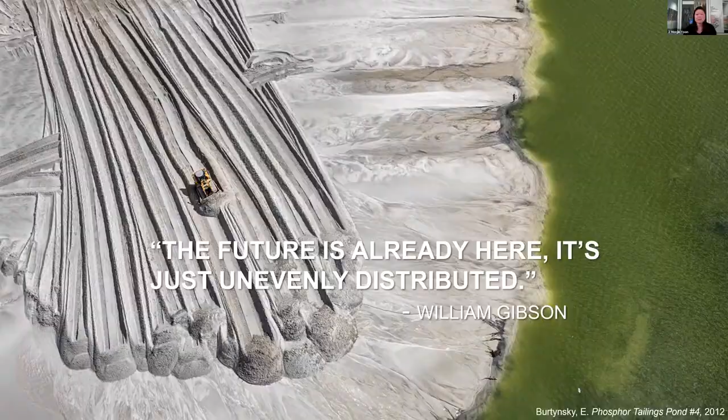As shared by science fiction writer William Gibson, the future is already here, it's just unevenly distributed. So in order to peer into the future, we need only to look deeply into our present. And oftentimes the future is tucked away in our studios and labs on our campuses. The university is not only a place that has insights into the future, but it has an important role and responsibility in prototyping that future.

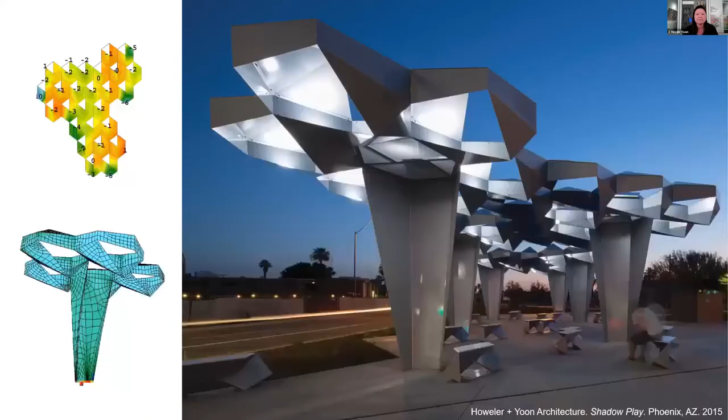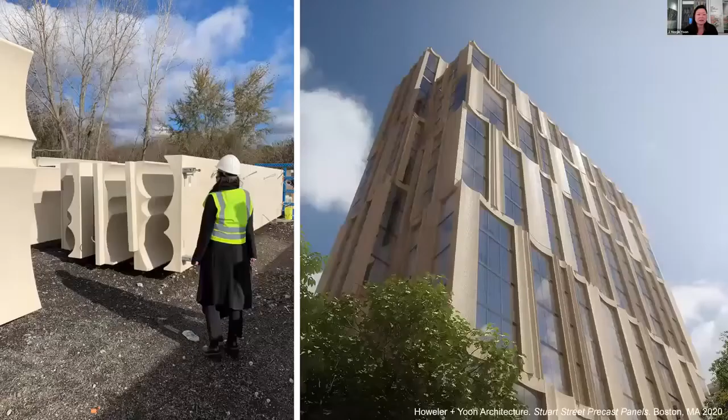My own design work and research moves between the studio, the lab, and the city, and is focused on public spaces, both in terms of the formal organization and the informal behaviors they engender. And specifically, the role of technologies in design, experience, and making is what I focus on—specifically the development and creation of publicness and public space. From interactive architectures and computation to create environmentally responsive structures, to robotic fabrication, my work examines the limits, constraints, and opportunities of design technologies and how these technologies might scale to the scale of buildings and ultimately to the scale of cities.

Our present moment is characterized simultaneously by a superabundance of information and digital connectivity, and simultaneously a continued lack of certainty. In fact, our age of information and big data coincides with the age of post-truth and an erosion of trust. According to German engineer and economist Klaus Schwab, we're in the midst of a fourth industrial revolution.

An age of rapid societal transformation at the global scale, transformed by science and engineering, from mapping the human genome to robotics and additive manufacturing to machine learning and artificial intelligence. These technologies are enabling us to, on one hand, solve extremely complex problems, but they're also rapidly changing the way we create, exchange, and distribute value.

Facing a paradox between accelerated technological progress on one hand and the daunting public health and environmental challenges on the other, designers are asking simple questions with complicated answers, most often beginning with what can we do and how can design better serve the world? How do we use design to think through the biggest design challenges of our time?

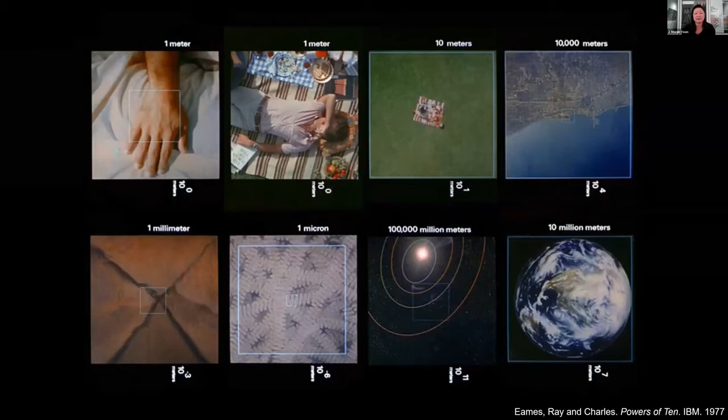Among designers who expanded the definition of design were Charles and Ray Eames, who so elegantly in their film, The Powers of 10, examined the relative scale of things from the microscopic to the macroscopic across science through design. And maybe another more contemporary example of design across scales might be Apple.

We used to, for my generation, think of Apple as a computer company. Through a redesign of their own Powers of 10, they went from designing computers to redesigning the whole user experience between communication, information, and media. And they created a whole design ecology of objects, interfaces, experiences, and services. They leverage design across scales, and they also are designing more than functional objects. They're designing demand. So design has never had the status it has today.

The proliferation of the term in business schools and engineering programs are indicators of this status. But in my opinion, design is as much an art as it is a science. It's nonlinear. It requires expansive analysis of constraints and opportunities, but it also requires a high level of discernment, synthesis, and aspiration. And thus, design is more a searching than a solving. It's more an inquiry than a methodology.

I think one of the best definitions of design I've heard is from Herbert Simon, who is a political scientist and early framer of the field of artificial intelligence. In '69, he said, if science is concerned with the world as it is, then design is concerned with how things ought to be. It's this oughtness, the world as it ought to be, that articulates the goal of design, which is an inquiry into our deepest human values and aspirations.

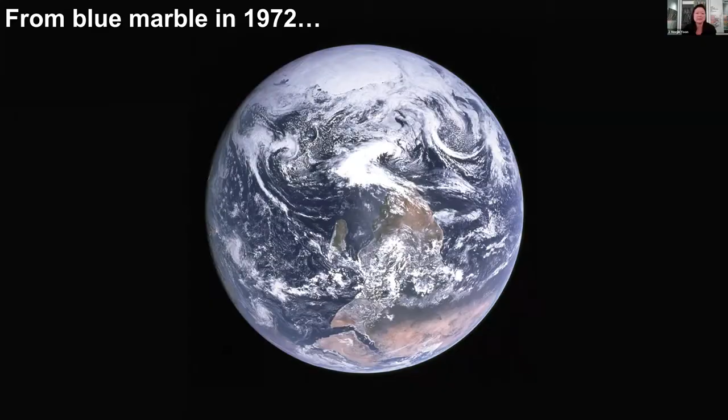If design requires imagination, then how do we image the world, and how we image the world matters. The famous image of the blue marble, the first clear image of the Earth beautifully illuminated by Apollo 17, taken by Apollo 17 in 1972, allowed us to see for the first time the Earth in both its fullness and its vulnerability. The image awakened an environmental consciousness that would lead to the global environmental movement of the 70s.

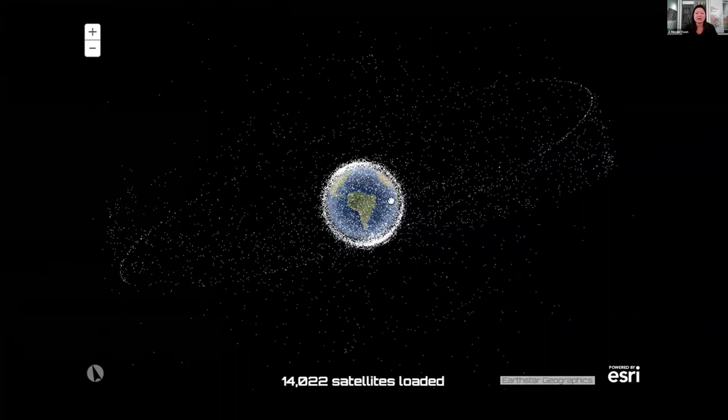Climate, as opposed to weather, is not something you can perceive. Climate is the sum total of weather phenomena, its averages, its patterns, its trends. It's a statistical condition. We cannot truly design for climate change without leveraging these massive amounts of data.

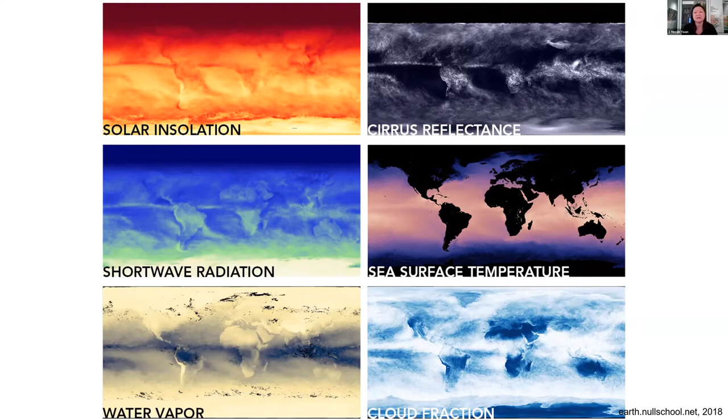So what does this data show? This representation shows the impacts of climate, 100-year storms happening more intensely with devastating impacts on communities and cities. Can we design our way out of these catastrophes? Could these catastrophes be avoided?

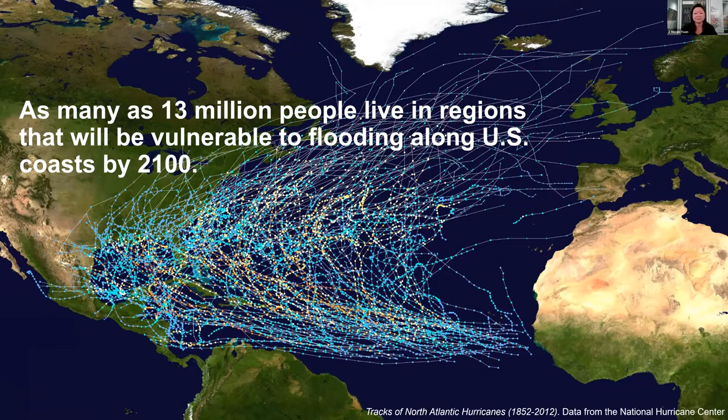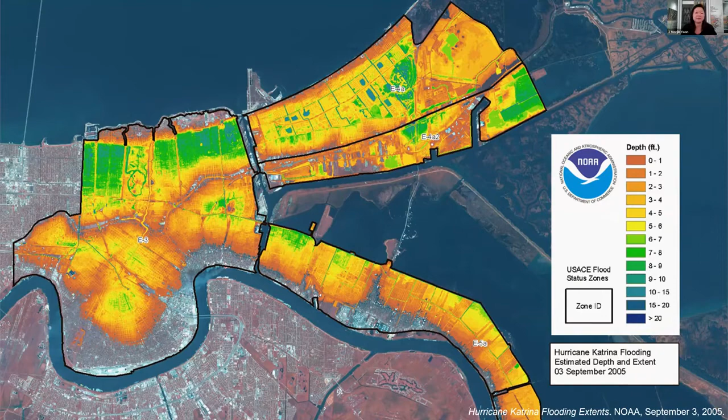Increasingly, we see that these catastrophes are not force majeure, but a combination of bad design decisions and severe weather events. Here we see a flood map of New Orleans after Hurricane Katrina, which makes quite evident that the hurricane was not just a natural disaster, but a man-made one as well, where poor design decisions from land use patterns to failed infrastructure had a catastrophic impact on the city.

When Katrina made landfall in 2005, the storm surges caused a failure of over 50 levees, submerged 80% of the city, and led to approximately 1,800 fatalities and the loss of 125 billion in property.

This was a feature that did not need to happen. It was not only predicted 40 years earlier, but it was directly experienced in 1965. Hurricane Betsy devastated the same region. The storm killed over 70 people. It was the first hurricane to cause over $1 billion worth of damage. The images are eerily similar, making evident the failure of design and politics to learn from its past mistakes and propose better design solutions for tomorrow.

If we zoom out a little further, we understand better the relationship between the Mississippi and the Gulf of Mexico. On the left, we see this extraordinary map by the Army Corps of Engineers, which records the movement of the Mississippi. It was actually through the hardening of the Mississippi with dams and levees to control the adjacent flooding that contributed to the reduction of the wetlands that historically provided a natural buffer to the hurricanes along the Gulf.

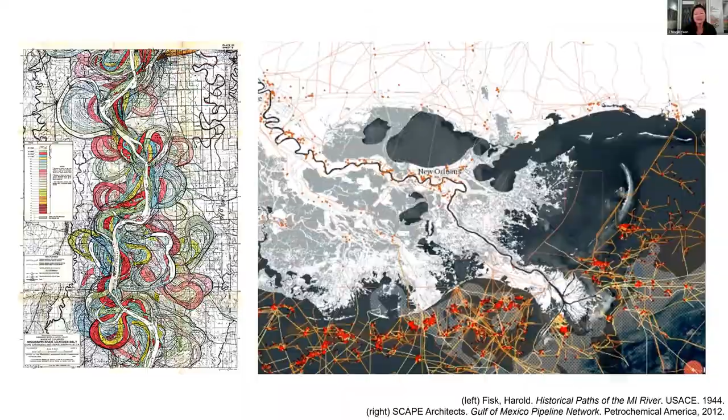We often hear the terms sustainability, resilience, and adaptation used interchangeably, but I think it's important to understand the nuances between them. Sustainability suggests that the goal is to sustain a recent or near recent condition. Resiliency implies a kind of bounce back, literally. And adaptation, on the other hand, asks, should we really be striving to bounce back, or should we be adapting and changing in new ways?

Hurricane Sandy was a kind of wake-up call for designers, and it precipitated all kinds of government and institutional programs to rethink coastal design, including the Rebuild by Design competition sponsored by HUD.

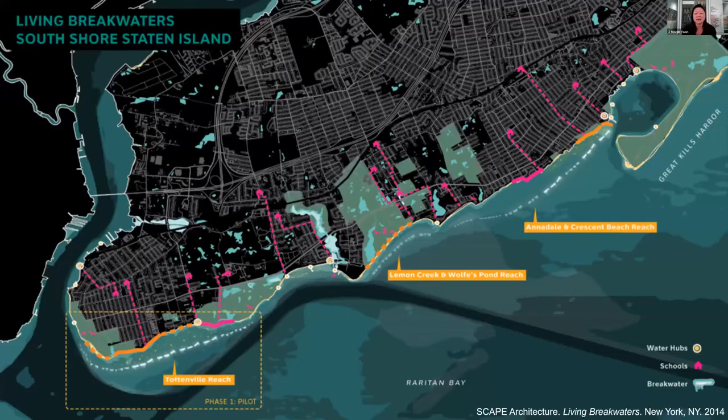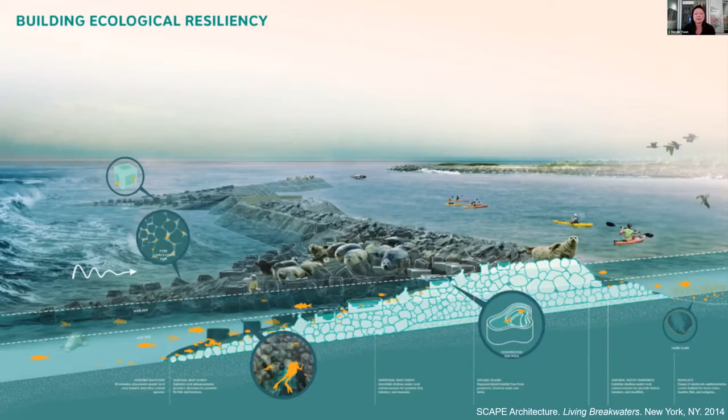One of the most interesting projects that came out of that was Living Breakwaters by landscape architect Kate Orff, who overlaid coastal resiliency infrastructure with habitat enhancement techniques to buffer neighborhoods from wave damage by both thickening and softening the edges with habitat for oysters and other organisms, essentially creating a kind of living breakwater infrastructure. This proposal was awarded $60 million in funding and is currently being implemented.

So I think this project demonstrates that the future of sustainability may be more brown than green and more soft than hard as we look at adapting our coastal cities to sea level rise.

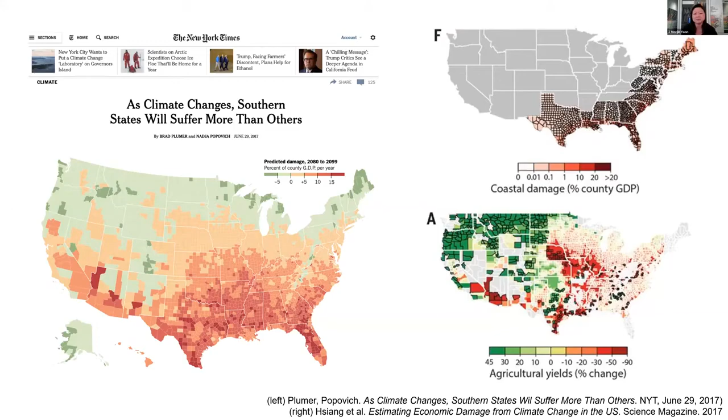The other thing we know is that the impacts of climate change will not be evenly distributed. Professor Linda Shi from Cornell City and Regional Planning looks at coastal conditions here in the San Francisco Bay Area, where different communities are battling sea level rise independently, at times creating local solutions that have the cumulative effect of creating more disastrous sea level rise impacts on neighboring communities, exacerbating the unequal vulnerability between those that can afford resilient strategies and those that cannot.

Students in her climate adaptation workshop project how one town will experience infrastructural, social, and fiscal vulnerability from sea level rise, helping to create awareness among public policymakers about the need for regional collective action to mitigate local impacts.

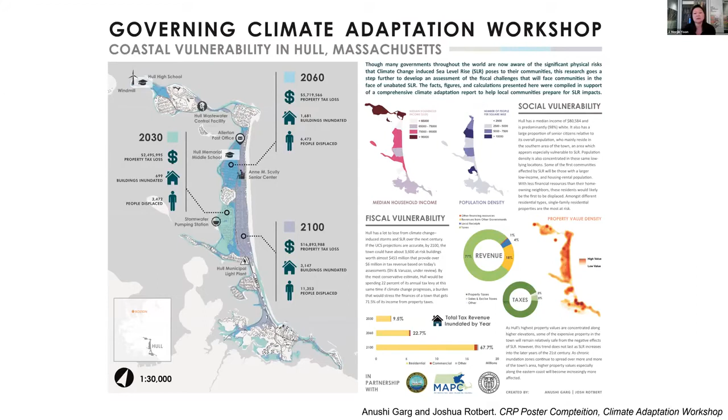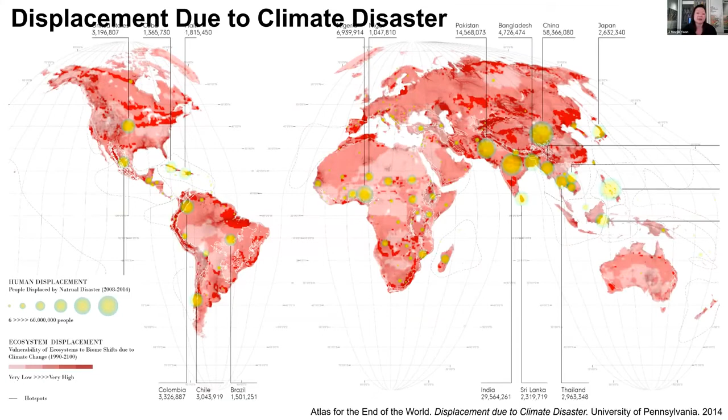Climate change is, of course, not only a problem here in the US, but around the world. Drought, famine, flooding, and disease are just a few of the many secondary effects of climate change, all of which result in the migration of people from places that are no longer sustainable or habitable. While migration is not a new phenomenon, it's steadily growing.

In 2018, 17.2 million people were forced to abandon their homes due to disaster, and this number is expected to rise above 22 million this year. In sum total, migration has reached a record high. The UN reports that there are nearly 71 million persons of concern.

26 million to 29 million people are considered refugees. 41 million are displaced within their home countries, and more than 35,000 people were forced to flee their homes every day in 2018. That's nearly one person every 2 seconds.

One of the greatest design challenges with migration is the precarity of human settlement. Refugee camps are temporary and provisional by mandate, and despite the fact that many refugees stay in these camps for an average of 12 to 20 years, due to policies, these camps cannot provide more permanent shelter or infrastructure. The resulting condition is essentially a permanent condition of temporary encampment.

Due to the number of displaced people who move to cities for better access to resources, thinking of migration as an urban design and policy design problem is crucial. If the current growth rate of cities is maintained, then 6 billion people will be living in cities by 2040, with a quarter of that population living in informal settlements. Designers, planners, and governments will need to rethink access and provision of basic services at unprecedented scales.

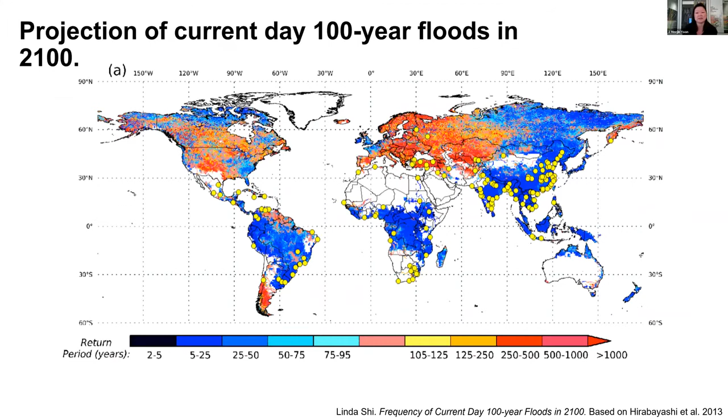Furthermore, the number of cities facing extreme risks from climate change are astounding. Some 84 of the world's 100 fastest growing cities will face layered challenges from rising temperatures and sea level rise. By 2030, the world is projected to have 43 megacities with more than 10 million inhabitants, much of them in developing regions. Many countries will face challenges meeting the needs of their growing urban populations.

While rapidly urbanizing cities are both our greatest design challenge, they're also our best opportunity for tackling design of climate at scale. How we design and build our cities will have a significant global consequence. Essentially, 1/3 of CO2 emissions comes from the transportation sector, and the other third comes from the construction sector, and both are inextricably intertwined with how we design and think about buildings and our cities.

As you may know, buildings are extremely resource intensive. And while the building and architecture industries have focused on performance to achieve green standards, the operation of a building represents only 20% of the energy consumed in the full life cycle of a building. The material ecology of a building, from resources extracted to manufacturing to construction, to its demolition and eventual resting home, is where the greater portion of energy is consumed and carbon emissions is produced.

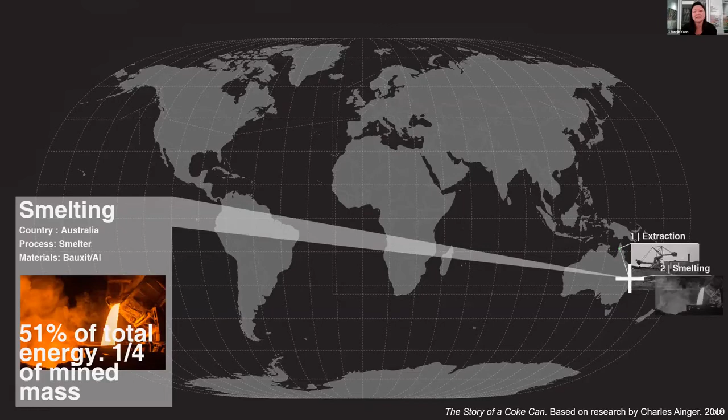Maybe I could illustrate this complexity of supply chain and energy consumption for a very simple design object like an aluminum Coke can. Bauxite is mined in Australia, then it's smelted and it consumes 51% of the total energy to yield a quarter of the mined mass of the ore. Then it's shipped to Sweden, where it's hot rolled, it's cold rolled in Germany, it's then stamped in England, it's washed in France, then it's shipped to the United States, and it's stocked in 2.8 million vending machines or stores, and then it's consumed in a few minutes and then tossed in a landfill.

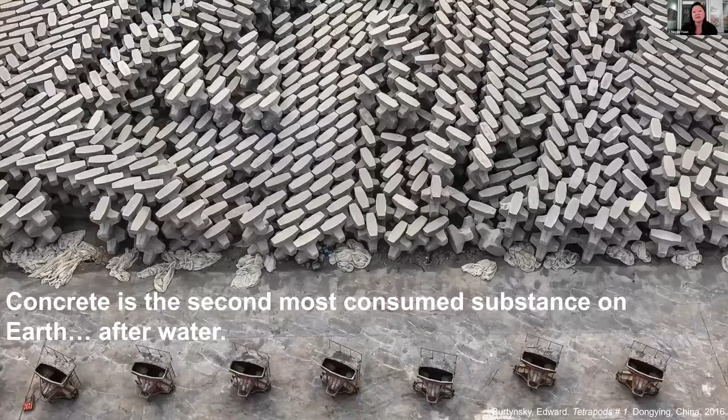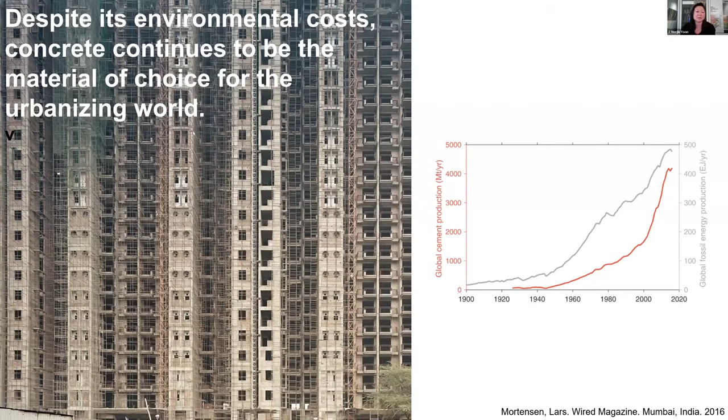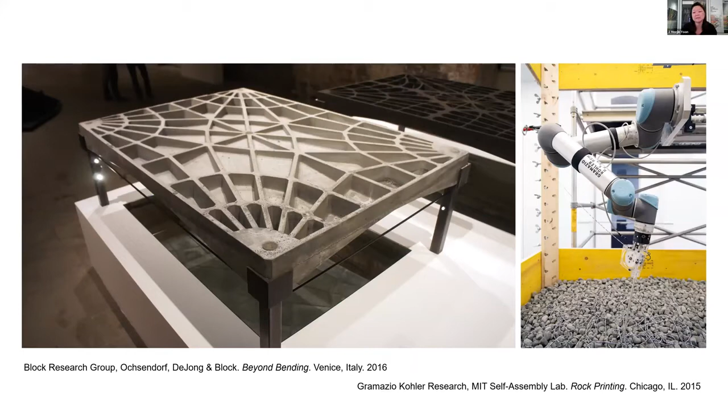Concrete is the second most used material on Earth, only second to water. It's the most widely used construction material in the world, but it's also the most environmentally damaging. The manufacturing of concrete alone is responsible for 5% of global carbon dioxide emissions, and it's a material that cannot be easily recycled. Yet, it's the preferred material of choice in the rapidly urbanizing world. Many architects and engineers are researching ways to make concrete more sustainable. Another area of innovation in sustainable construction is in the area of mass timber.

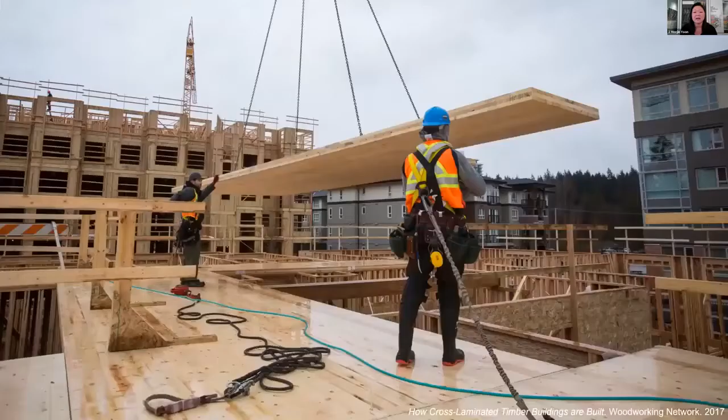Wood is a rapidly renewable material when paired with sustainable growing practices. Here we see Lisa Gray's research at Timber City, which explores the environmental efficacy of mass timber construction technologies. The emergence of mass timber uses solid and composite woods assembled together to create more structural integrity. Researchers speculate that one could build mass timber buildings that are 30 to 40 stories tall. And while that goes against our conventional wisdom, because wood is a combustible material, timber at a certain mass actually produces its own fire retardant behavior.

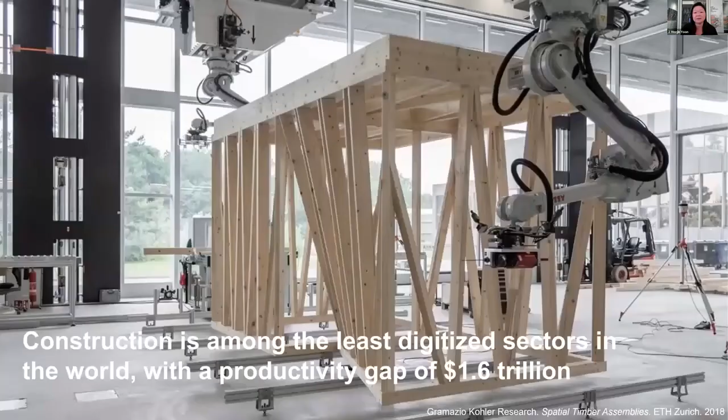Interestingly, the construction and building industry remains one of the most archaic industries. One of the foundational principles of industrial construction is the standardization of parts. However, standardization, like the creation of your standard 2x4, results in a significant amount of material waste. And while other industries have increased productivity exponentially through the use of automation and robotics, building construction remains the least digitized sector, with a productivity gap of $1.6 trillion.

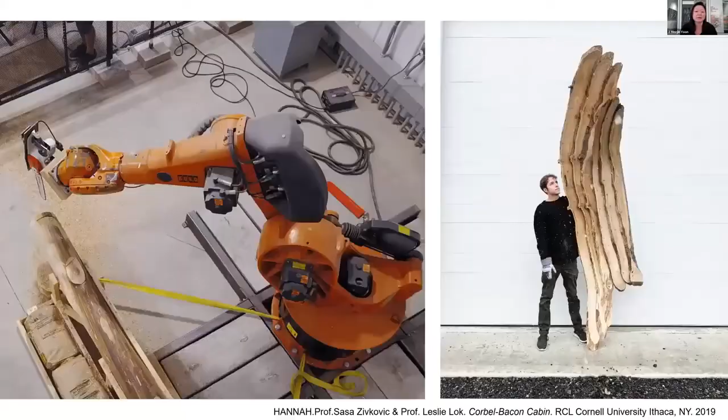One area of technological advancement that we're beginning to see in construction is robotic assembly and fabrication, from drones that stack modules to large-scale robotic arms in situ.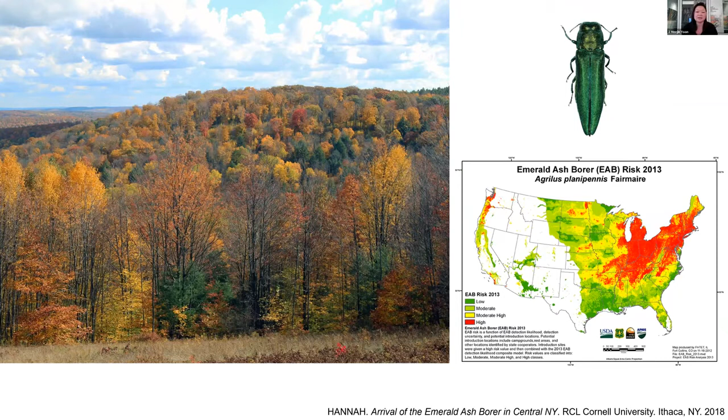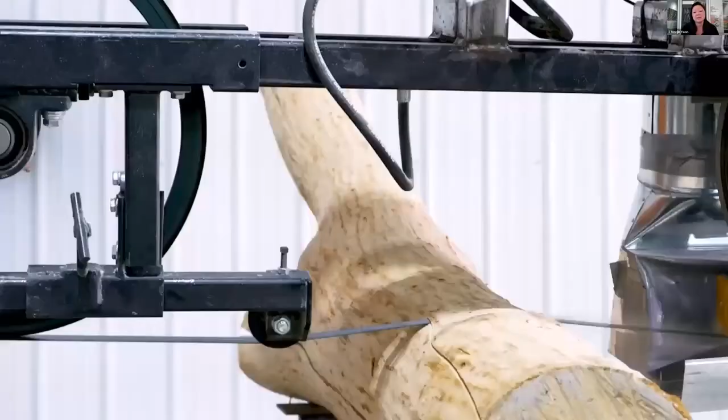This is a project I wanted to introduce called the Ashen Cabin, recently completed by Professor Sasha Zivkovic and Leslie Lok at Cornell's Robotic Construction Lab. The project responds to the local condition of the emerald ash borer that has infected ash trees across the Northeast and across the United States. Professor Zivkovic and Lok use these diseased trees not only as building material, but they work with the uniqueness of each of these diseased trees. They've developed a tool that processes irregular timber stock, allowing the robotic arm to carve irregular pieces of lumber that would normally not be possible if they had to work with industrialized standard timber manufacturing processes.

So here you can see this unique piece of diseased ash tree, which wouldn't be able to be used otherwise, being carved by this robotic arm to be used as cladding on a concept cabin, which also used 3D printed concrete for its foundations.

Images like this force us to think about material use and reuse. As mentioned before, the foundational principle of industrial construction is the standardization of materials. However, after a building is built, its materials become non-standard, challenging their reuse. Yet recycling and upcycling materials are key to reducing CO2 emissions.

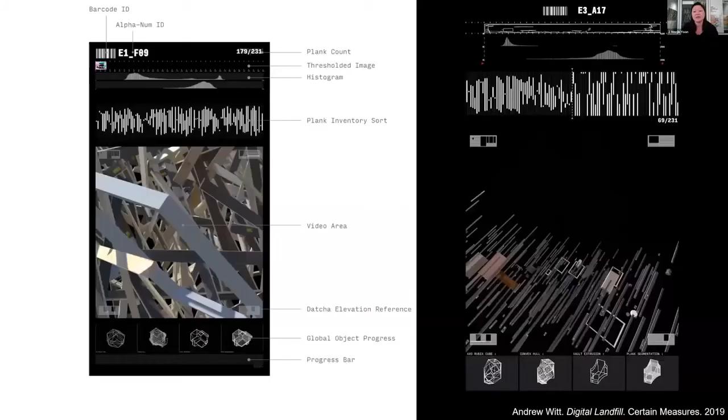Andrew Witt's work—he's a faculty member at Harvard GSD—shows in this digital landfill project how one could respond to the afterlife of a house. This house was scheduled to be demolished. Leveraging computational power, each of the components was cataloged, measured, and entered into a machine learning algorithm, which resorted all the elements to populate new forms out of this old material, essentially using waste to create new forms.

Architects are thinking more about embodied energy, more about material procurement, and more about the full life cycle of a building as they make design decisions.

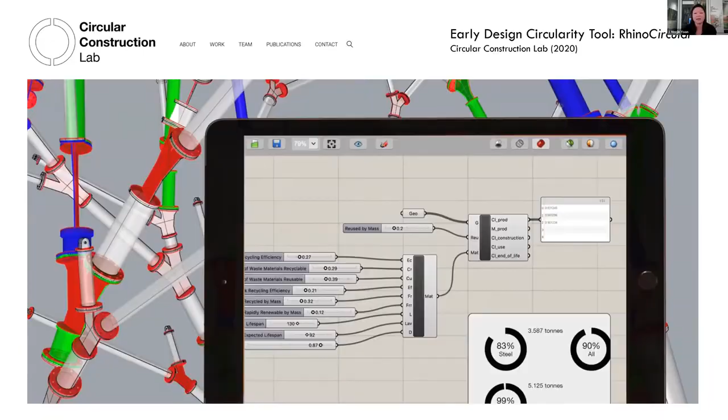Professor Felix Heisel here at AAP Circular Construction Lab is researching how to create a paradigm shift from linear material consumption towards a circular economy within industrialized construction industries. He's developed a new tool that enables the tracking of building components to help us better understand embodied energy. Here we see an urban scale material stock inventory measuring the circularity on both buildings and a regional level. I think this work is really exciting for where it will take the industry.

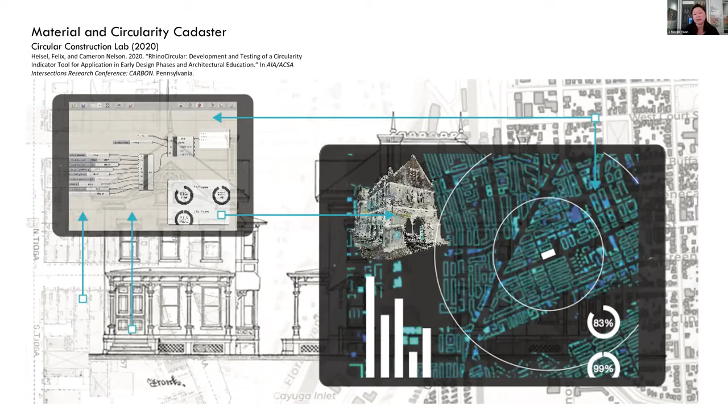So as we project into the future, if the last age was the age of industrialization and physics, we now have entered into an age, I think, of biology, where many designers are looking at nature in new ways to radically rethink our building blocks, quite literally.

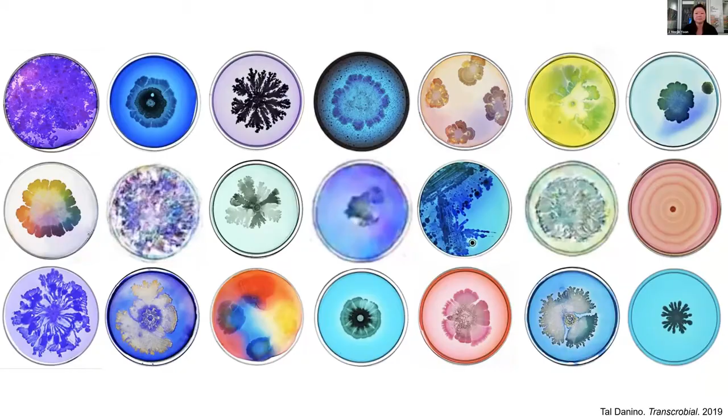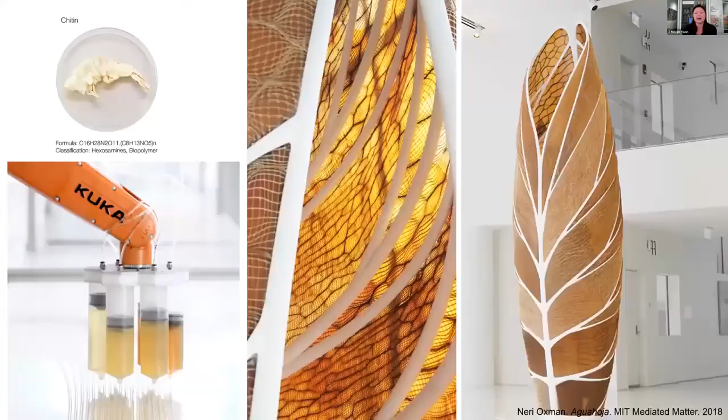From organic materials like mushrooms, asking how the material can be grown, processed, and compressed to make new compostable bricks—this is a project by David Benjamin at Columbia—or the work of Neri Oxman at MIT, who's researching chitin, found in shells, as material that can be 3D printed into new structures, to even partnering and co-creating with nature, here with silkworms to weave a silk pavilion.

Not all of biology, as we know, is collaborative, and we're just beginning to understand the complex biology powering the coronavirus pandemic. Scientists have learned that the virus has evolved an array of adaptations that make it more lethal than any other coronavirus humanity has met so far.

COVID-19 is our first pandemic of the jet age, where our physical interconnectedness via planes, trains, and subways circulated the virus rapidly across countries, territories, and regions. But it's also the first pandemic of the fourth industrialization, where data science, genomics, rapid prototyping, distributed manufacturing, and machine learning are contributing to research and vaccine development at speeds previously unheard of.

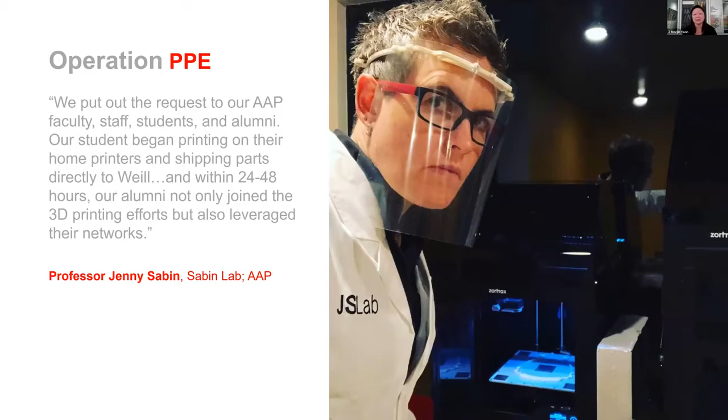It's also created a culture of collaboration and interdisciplinary innovation in science, engineering, and design that we've never seen before. Here at Cornell, Professor Jenny Sabin in the Department of Architecture, along with Professor Kirstin Petersen in Electrical Engineering and Computer Science, and Professor Amy Kuceyeski of mathematics at Weill Cornell Medicine, responded to a call by Dr. James Shin at Weill Cornell Medicine, and stood up what they called Operation PPE, utilizing their distributed network of rapid prototyping 3D printers across campus and through our network of alumni and industry to fill a desperate need for PPE in the early days of the pandemic, putting to use over thousands of individual 3D printers.

This spirit of interdisciplinary collaboration and mutual aid to develop solutions quickly through a distributed network led to further collaborations across institutions and the country, where architects, industrial designers, engineers, and doctors were working together to design everything from masks to non-rebreathers to patient isolation hoods.

That spirit of collaboration has continued today, and in Professor Sabin's class, Designing and Making Across Disciplines in COVID-19, the students are looking at methods that are emerging through new technologies across design, engineering, and science to synthetically think and make design solutions in response to COVID-19.

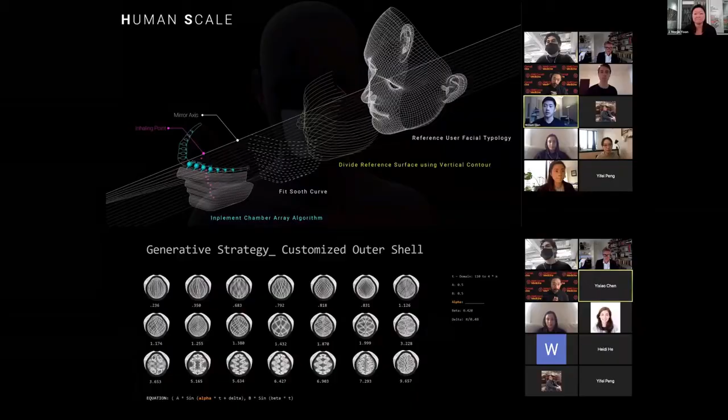Here's an example from Sabin's lab at Cornell in collaboration with Black Box at Princeton for a fabric harness, which allows individuals to turn any available piece of fabric into a custom fitted mask with this flexible face frame. I think it's really, really brilliant.

So sometimes in order to design the future, we have to look long and hard at our past. I'd like to conclude the lecture this evening by sharing the story of a memorial at the University of Virginia. This is a project that I've been really humbled to work on with an incredible design team of collaborators, Mabel Wilson, Frank Dukes, Gregg Bleam, Eto Otitigbe, and Eric Höweler over the past 4 years.

But the story begins over 400 years ago, when an estimated 430,000 men, women, and children were kidnapped and trafficked from Africa to the Caribbean to the American colonial South. They were forced to labor to support an economy based on the agricultural production of cotton and tobacco.

Founded by Thomas Jefferson, the University of Virginia holds a special place in American history. The grounds and the academical village are on one hand associated with the ideals of democracy, yet its foundations were literally built by slavery. As you can see from this historical marker, there's no mention of that in the standard history of the university. So the Memorial to Enslaved Laborers endeavors to tell the story of the estimated 4,000 men, women, and children who built, worked, and lived at the university from its founding in 1817 to the end of the Civil War.

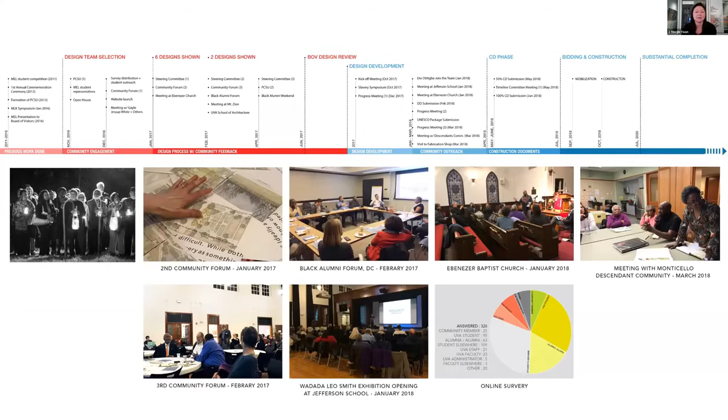We went from classrooms to local schools to churches. We spoke to community members and to members of the descendant community. And we didn't ask them what the memorial should look like, but we asked them what kind of meaning the memorial should have. It became really clear through that engagement process that for the memorial to have both meaning and relevance, it had to, of course, honor the lives of the enslaved, but it also had to advance the commemorative landscape for racial justice today.

So in our conversations, what we heard was that the memorial would need to tell the unvarnished truth of the past to have any legitimacy, that it needed to bring the community together to both learn and reflect on that history, and that it needed to express dualities, not only of pain and suffering, but also resilience, dignity, and humanity.

And lastly, it needed to be a living memorial and an ongoing memorial to acknowledge the work of this history that it remains incomplete. So in order to design the project, we developed a design process to make the process very open and to foreground dialogue.

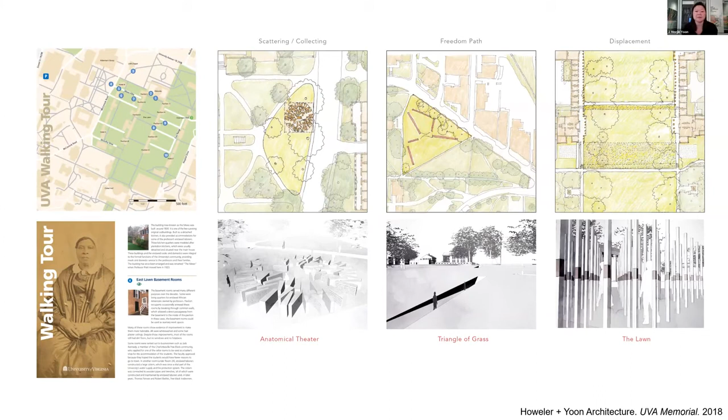And we developed a series of different design approaches. And what emerged was a consensus that, in contrast to many monuments that stand as an object in space, the memorial for enslaved laborers needed to be a space for the people of the present to recognize and reconcile the present with the legacy of the past.

So as part of the design process, we also looked at cultural forms and rituals that could be translated into our design, from the ring shout, a low country ecstatic dance which comes from West African practices, to hush harbors, which were clearings in the woods for the enslaved to gather in safety, and then also water, which became a means to tell the story of liberation and was found in libation rituals.

We also heard the memorial had to forge a connection with the community and participate in a local commemorative landscape, that of Freedom Day, which occurs on March 3rd every year and remembers the day the Union troops liberated the 14,000 enslaved people in the region.

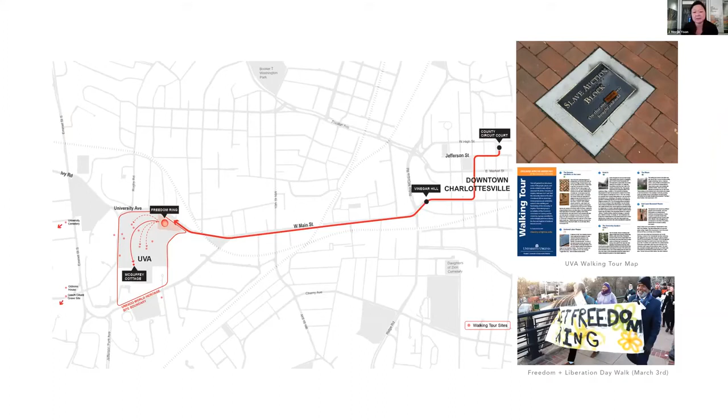And here is a community gathering on what would become the site of the memorial the following year, gathered together on Freedom Day with the simple gesture of coming together in a circle.

So the memorial is sited in dialogue with the rotunda, which sits at the highest point of the lawn, which Jefferson placed on that hill. And he also carefully terraced the lawn in section, which allowed Jefferson's pavilions to be two stories when facing into the lawn, but three stories on what was called the garden side, which created a lower walkout basement level, which actually housed the spaces and workyards for the enslaved labor.

The spaces behind these pavilions were hidden by the famous serpentine walls, and Jefferson understood slavery to be abhorrent and employed architecture and the architectural section in order to conceal it. The memorial's architecture, in contrast then to those strategies, works to reveal and open and invite.

So in contrast to the rotunda, which is a closed sphere, the memorial is an open bowl-like figure. They're both 80 feet in diameter.

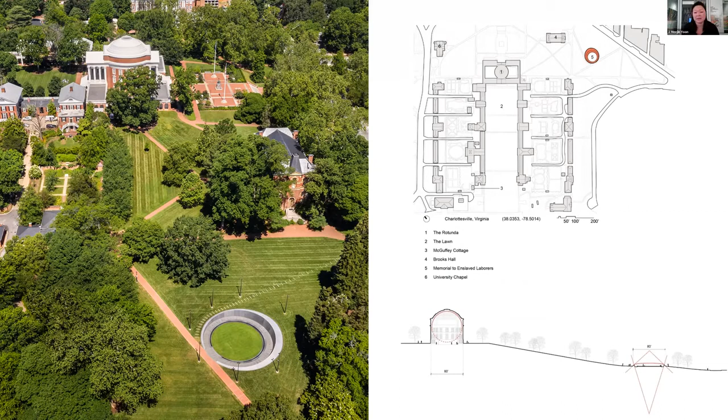So the memorial's nestled into a sloped terrain called the Triangle of Grass, which sits within the UNESCO World Heritage Site boundaries of the university. And it doesn't sit on axis, but it actually sits tangent along a diagonal path between the University Avenue and Academical Village. And the determining geometries consist of two cones that intersect slightly off axis.

And this intersection creates a circle, a crescent, a ring, and they're all symbols for many things that intentionally hold a multitude of meanings and references: a hollow, a void, a ring shout, a gesture that's open to interpretation.

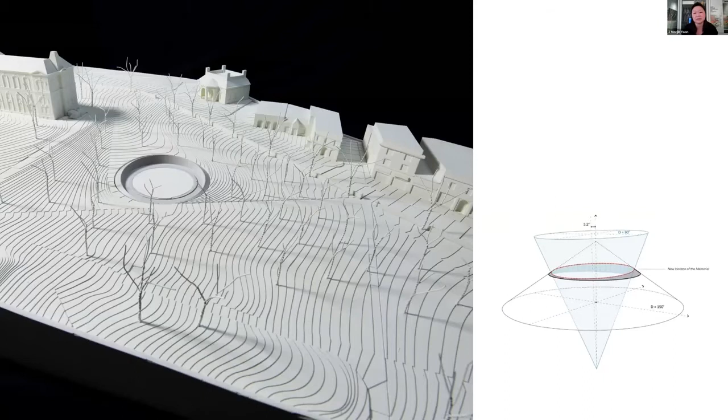And the conical intersection creates a series of nested rings, which offer multiple layers that unfold the stories of the enslaved. The center holds a gathering space, which is inscribed by an inner ring, which holds a timeline of historic events. The next layer of the ring is a concave surface of remembrance, and then the outer convex surface creates the kind of canvas for expression. And each of these rings speaks to a different layer of history.

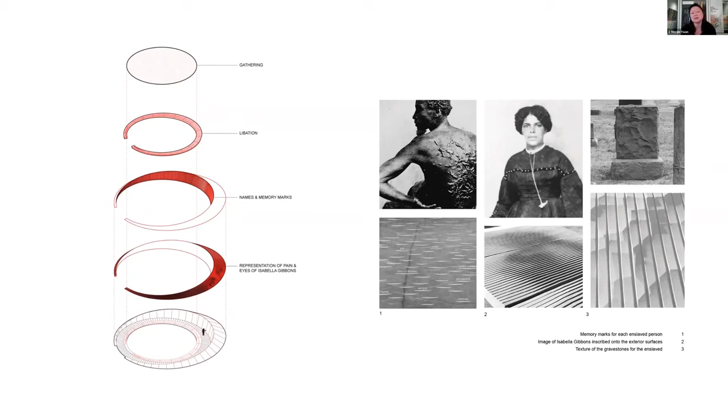The memorial itself is made out of just one material, a Virginia Mist local granite. And the goal was to use the full range of this stone to enable it to speak in many ways through its textures and its carvings.

Because the enslaved were considered property, while there was careful, meticulous accounting of their labor, their identities were largely unknown. We worked closely with a group of committed historians who examined the archives and the ledgers and the personal letters of slave owners to unveil the daily life, labor, and violence of the community.

Historians estimate that approximately 4,000 men, women and children built, labored, and lived at UVA. But we know very little detail. For most of the names, for 3,111 persons to be exact, the archives do not record a first name or even a last name. Records for about 889 persons record some aspect of their identity.

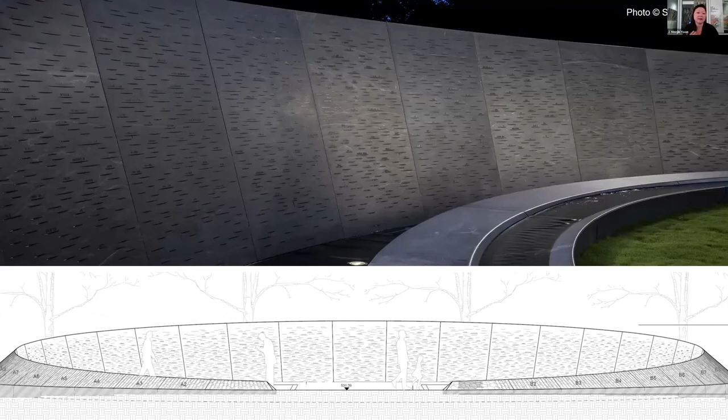And we know sometimes just a portion, a first name or a last name. And for the remaining 311 recorded persons, we have a sense of only kinship relationships and occupations. So the result of this research yielded the design of a genealogical cloud of this community, which consists of 4,000 memory marks, as we call them, lines carved into the stone to recognize each individual.

As you walk around the memorial, you become enveloped by this cloud of names, marks, and relationships. And the list of names rehumanizes the experience of the enslaved, between the names, the kinship, and the skills that they had.

The marks themselves are a kind of gesture of an arc, which gashes into the stone. Because it goes deep into the stone, it holds water a little bit longer after it rains. So the flat surfaces dry rather quickly, but as the rainwater seeps out of these memory marks, it makes the stone appear to cry, weep, or bleed in memory of the enslaved.

In contrast to the wall of marks and names is a lower level water table, which shows the history of enslavement at the university. It's positioned just below the knees, so visitors have to lean in, almost in a kind of bowing posture, to read the names, to read the timeline.

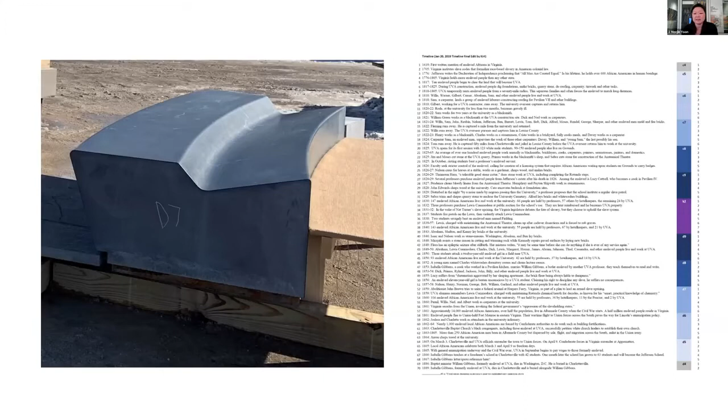There are 70 entries inscribed into this water table timeline, beginning with the arrival of the enslaved in 1619, and it ends with the passing of Isabella Gibbons in 1889. It covers the arrival of the 10 enslaved laborers who cleared the land that would eventually become UVA in 1817, and it covers a history of transactions, work, and violence.

I wanted to read just a few samples of the entries. 1820 to 22: Sam works for 2 years at the university as a blacksmith. 1832: three professors purchase Lewis Commodore at public auction for the school's use. They are later reimbursed and he becomes UVA property. In 1856, an enslaved 11-year-old girl is beaten unconscious by a UVA student. Claiming his right to discipline any slave, he suffers no consequences.

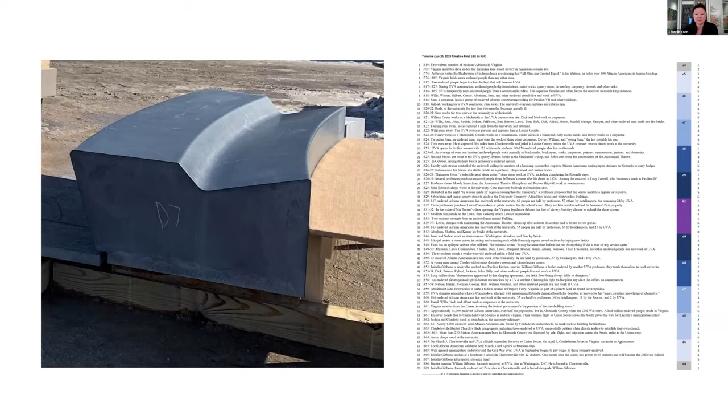The succinct, matter-of-fact tone of the timeline entries paints the difficult and unvarnished history of the life and violence of slavery with poignancy. And then a steady stream of shallow water washes over the entire arc of the timeline.

And so as a team, we really found Isabella Gibbons to become the protagonist of the memorial. She's one of the few for whom we have a full name, a date of death, and a photograph, and a brief written record of her experience.

She operated on the spectrum of resistance as someone who taught herself and others to read and write while they were enslaved. She was witness to the freedom and liberation, and she became a teacher in the Freedmen's School until her death. In so many ways, she exemplifies the spirit of triumph over despair.

Can we forget the crack of the whip, the cowhide, the whipping post, the auction block, the handcuffs, the spaniels, the iron collar, the Negro trader tearing the young child from its mother's breast as a whelp from a lioness? Have we forgotten that by these horrible cruelties, hundreds of our race have been killed? No, we will not. No, we have not, nor ever will.

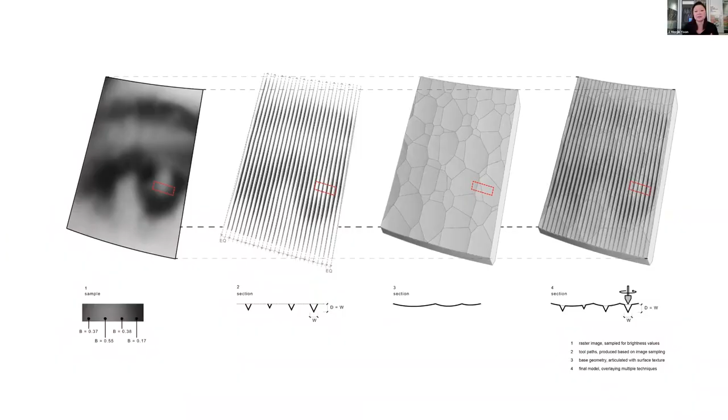During the design and fabrication phase, we worked with Quarra Stone in Wisconsin. With them, we developed parametric carving techniques using Rhino and Grasshopper that would allow us to ensure the eyes would become legible and visible at very specific vantage points. This took a lot of careful coordination and precision. Here you can see the eyes at a colossal scale.

So the memorial has become a new horizon line on the campus. Its exterior surface is overlaid with this gouge pattern, which highlights these dualities—the pain and violence, and then the dignity and humanity—and the many layers of meaning that come from the whole. The landform quality of the concave and the convex meeting in a way communicates something that maybe we're all still struggling to find the words for.

And the memorial is a living, ongoing memorial, and it's incomplete. So when new names come to light through historian research or genealogical research, we add them to the memorial. And during the process of the memorial construction, it was incredible that several additional names were discovered.

And lastly, the memorial's dedication did not happen in the spring as planned due to COVID. But as the construction fence was removed from the site, doctors, nurses, and students from the medical school were joined by the broader community in a memorial service organized by White Coats for Black Lives in remembrance of the murder of George Floyd. The community took a knee for 8 minutes and 46 seconds as a reminder of the past violence and injustices that persist in the wake of slavery. So the Memorial for Enslaved Laborers at UVA came into fruition through this collective desire to face the past, to reckon with truths, and to advance a better and more just future.